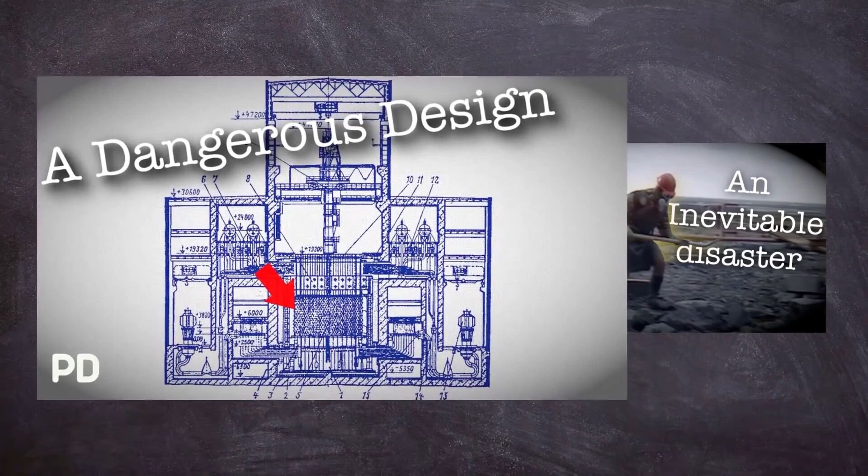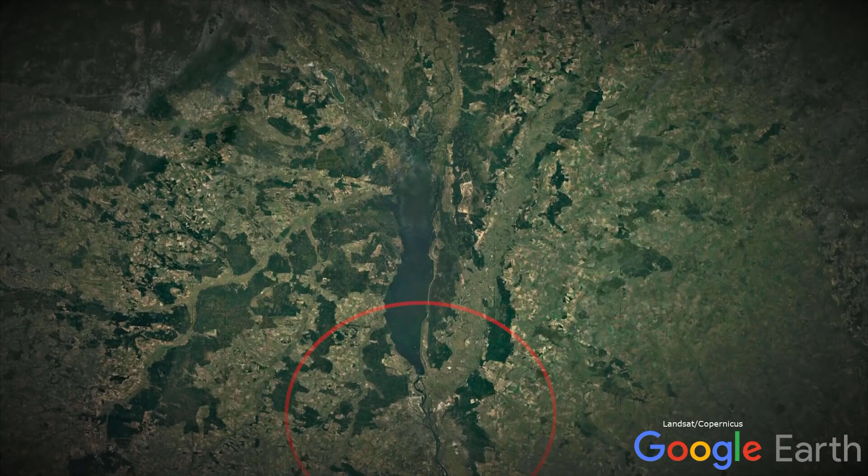Our story starts back in 1970 in Ukraine, about 100 kilometres, 62 miles, from Kiev, when ground was broken for a new city that would become known as Pripyat, an atomgrad that was designed to house the workers for a new nuclear plant. It should be said that the original plans were to build the city and the plant just 25 kilometres or 16 miles from Kiev, but it was thought to be too close to a major city, which turned out to be a good decision.

The concept of an atomgrad is similar to, say, Tomsk, which were closed cities, although Pripyat was open later on in its short lifetime as a city. These municipalities were designed to be self-contained communities that had a sole purpose, and that was keeping the power plant working and, by extension, the workers that were employed there happy. The community at Pripyat was developed to be the perfect home for a young family, with its amusement park and modern, at the time, architecture.

In the same year, the ground where the new plant would exist was prepared for construction. The Chernobyl nuclear power plant began construction proper in 1972 after the central government decided on what type of reactors the site would house. Originally, a pressurised water reactor was thought to suit the new plant, but it was overruled by Anatoly Alexandrov, the chief scientist who was at the time supervisor of the project of RBMK reactor plants. The reactor type was preferred due to the design being cheaper to produce, and as we found out with Leningrad, that cost was a pretty high priority, some might say even over safety.

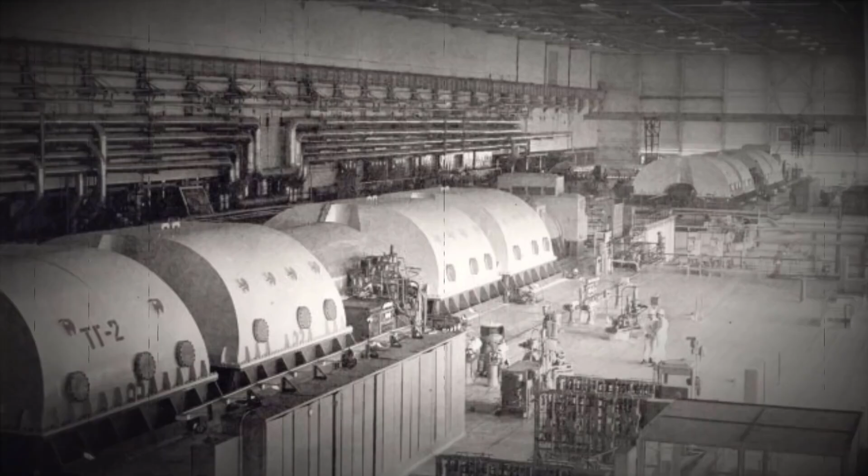The nuclear power plant had the first of its 4 reactors ready to operate in 1977, followed by number 2 in 1978. As a quick side note, Units 1 and 2 were the first generation RBMK 1000 reactors, and because of this they had slightly different core loadings and containment structures. But the remaining 2 reactors at Chernobyl were of a slightly more modern second generation, and they were named Units 3 and 4, which went online in 1981 and 1983 respectively. There were plans for another 2 units, but these were abandoned after 1988 when risks of contamination left the project untenable.

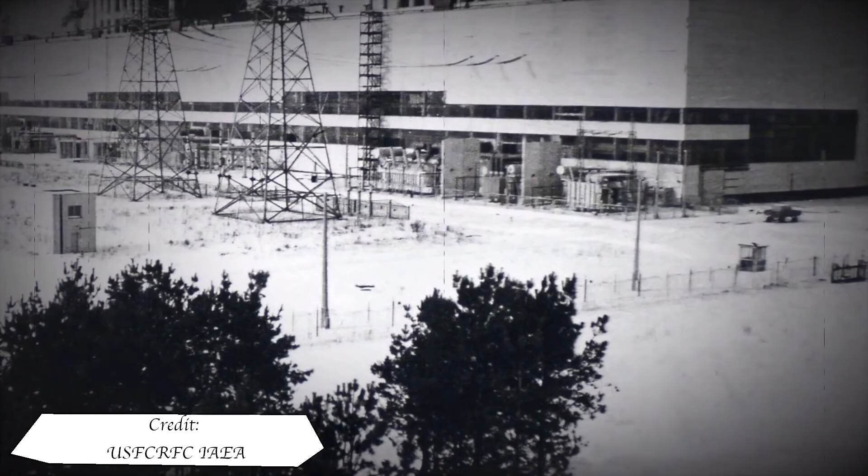The nameplate capacity of Chernobyl nuclear power plant was Unit 1 at 1000 megawatts of electricity, Unit 2 at 1000 megawatts of electricity, Unit 3 also had 1000 megawatts of electricity, and the same with Unit 4. In this video, I'll be focusing on the second generation RBMK, its design, and more specifically Unit 4. But I did look into the first generation in the Leningrad video.

The RBMK was a bit of a unique design in the reactor world, but it was a product of evolution rather than revolution, in that it used graphite to moderate the chain reaction with light water as a coolant. This combination allowed it to use lower enrichment uranium-235 for fuel, which is not surprisingly significantly cheaper than other reactor designs. The RBMK had a very large core region consisting of a height of 7 metres and a diameter of 11.8 metres, which was mounted in a steel cylinder that was placed on top of a biological shield.

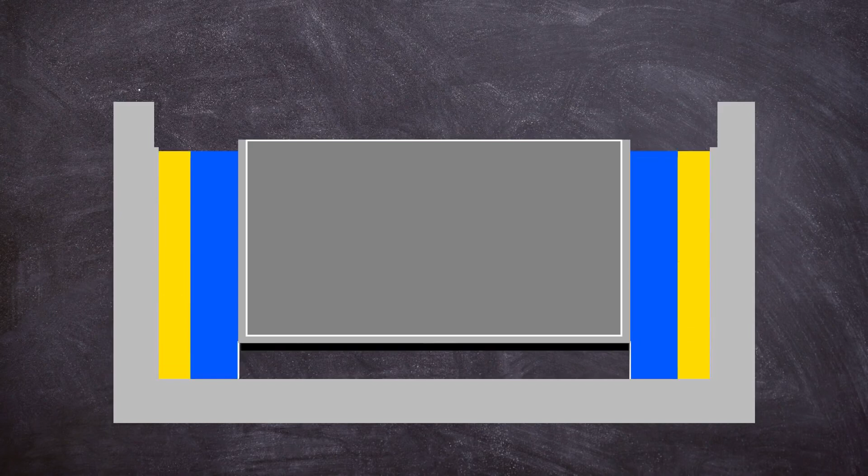The steel cylinder was 16mm thick and had a diameter of 14.52 metres by a height of 9.75 metres, dug into the floor of the reactor building, inside a reinforced concrete lined pit. Between the steel wall and the concrete lining, a water tank was placed, followed by a sand packing. Below the bottom biological shield, there were several basements used for pipework for the reactor core cooling loops. The core consisted of graphite blocks sized 25 by 25 centimeters, stacked up with holes drilled through the center for fuel and control channels.

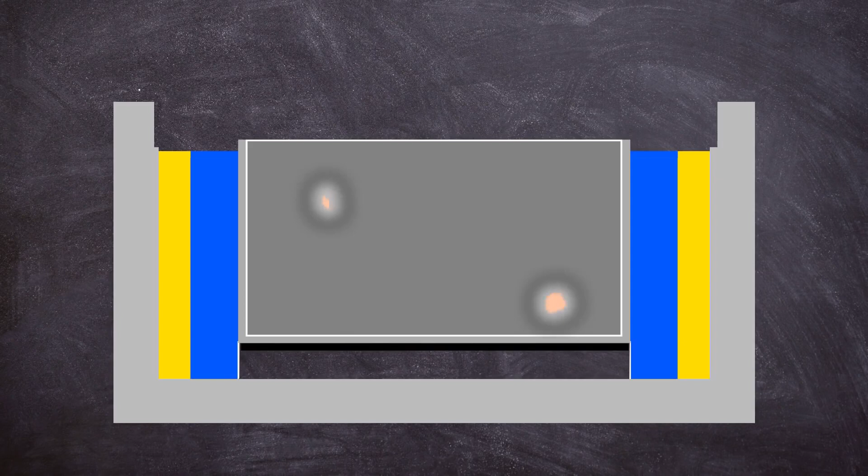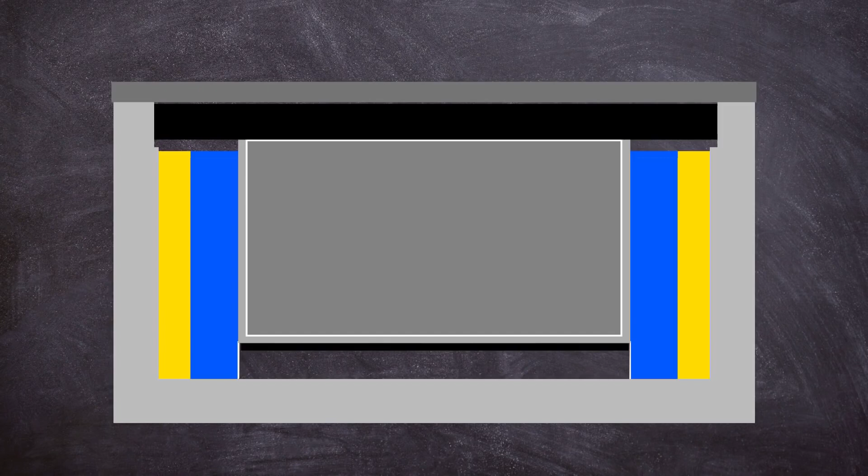The size of the core could cause issues in reactivity control during operation, but we will talk about that a bit later on. On top of the core, another biological shield was placed with a steel cover on top of it, which formed the floor of the reactor hall. The cover plate was capable of withstanding a pressure build-up resulting from steam released by two simultaneous channel ruptures.

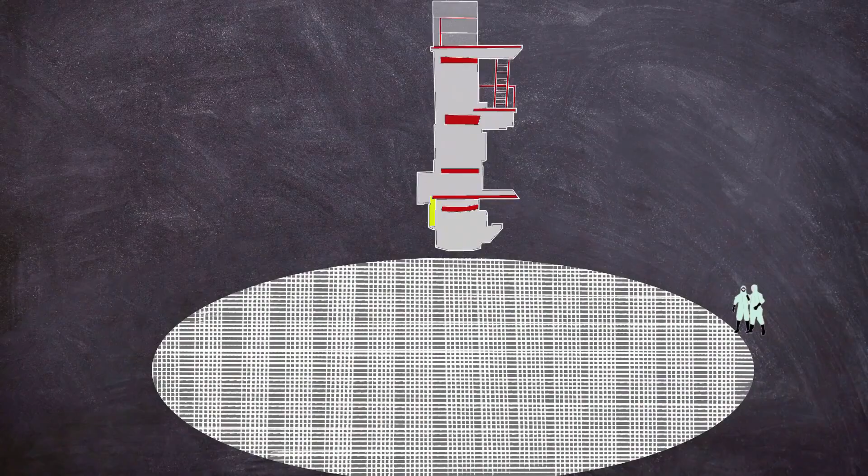All of this allowed the design to be refueled whilst in operation, which again helped with costs by reducing downtime. As a side effect of this, the confinement structure of RBMK reactors is less than ideal, as the tall refueling machine had to be housed inside the reactor hall. Because of the large floor space and subsequent roof requirements, the vast quantities of heavy concrete wouldn't have been architecturally, or more importantly, financially viable.

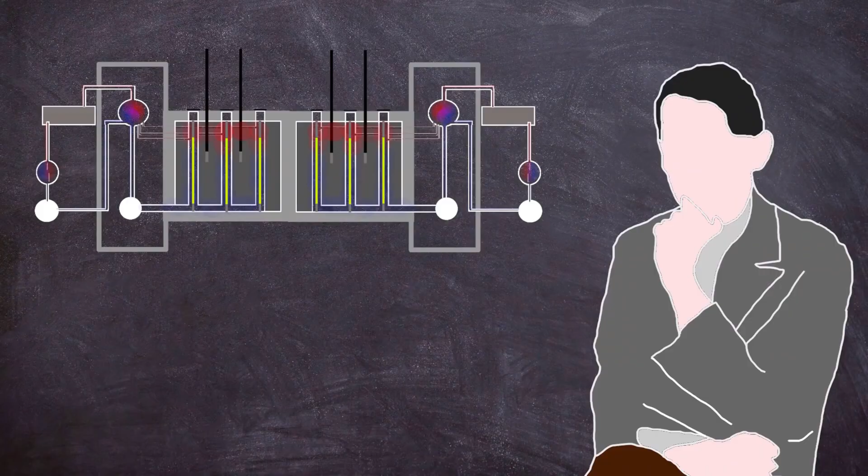The RBMK didn't have a prototype and was instead put straight into production, with the first reactor being installed in Leningrad in 1970. The original designs omitted confinement, instead claiming that the fuel being in its own channel with flowing cooling water was an acceptable alternative. The main takeaway from this is confinement was poor, resulting in disastrous results in the case of fission product release.

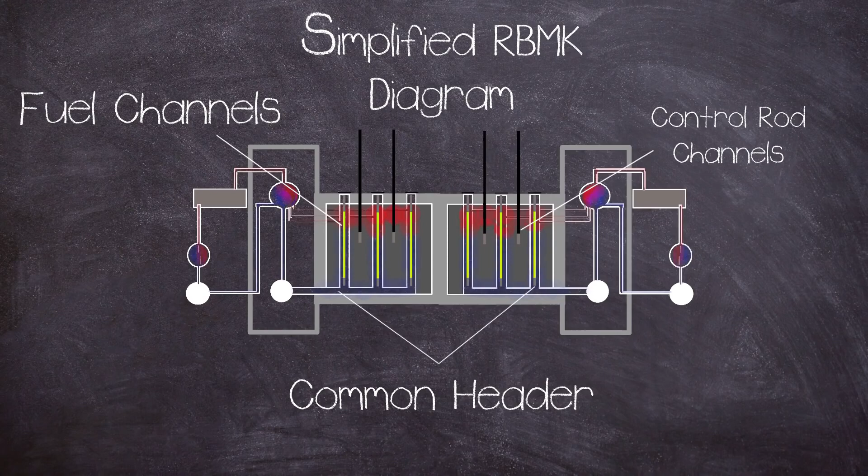The coolant was pumped through the core, from the bottom common header through high pressure tubes that jacketed the fuel elements, where the water would boil. Coolant water also circulated in the control rod channels. The primary cooling of the reactor was via two separate cooling circuits, one for each half of the core, meaning everything was doubled up, leading to eight main circulating pumps, which were three operating and one standby per loop.

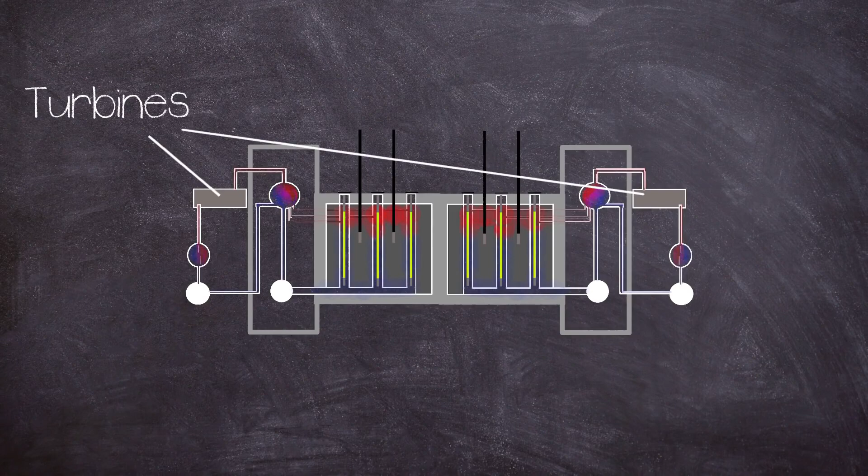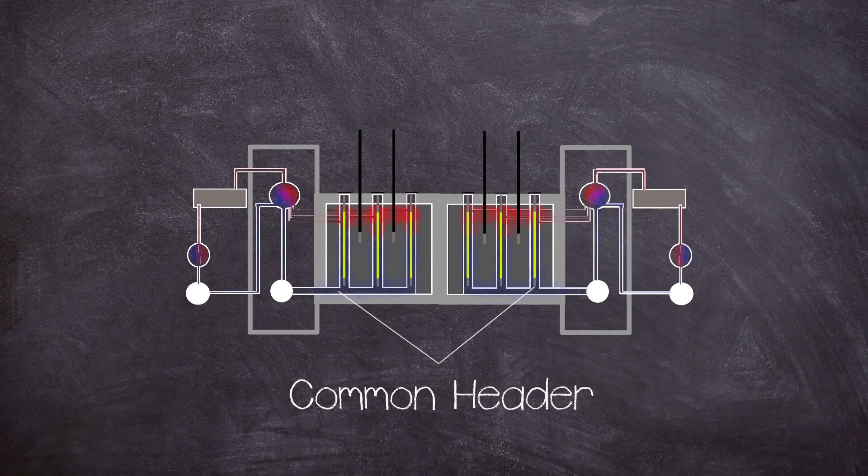As the coolant boils, it exits the top of the core and is passed through a water steam separator, which takes the steam to high then low pressure turbines which generate the electricity. The steam is then passed through a condenser that turns it back into water to be pumped back into the core, completing the primary cooling circuit. The condenser is cooled by using a separate secondary water cooling circuit, meaning the primary cooling circuit is self-contained.

As mentioned before, the reactor employed graphite blocks for its moderator. Now, a moderator is used to reduce the speed of fast neutrons released from fission, so they can better facilitate a chain reaction, getting more use out of the fuel. Ideally, moderators work without capturing any neutrons, leaving them as thermal neutrons. But where the design has its potential flaw is having a separate coolant that can also absorb neutrons, which can make the reactor unstable in certain situations.

This brings up the big elephant in the room, and that is void coefficient. You see, it wasn't just the graphite that had moderation characteristics, but the coolant water as well, because H2O naturally slows down and absorbs neutrons. This brings a problem for the reactor, as with the increase in temperature from fission, the coolant boils off into steam, known as voids, i.e. a bubble that does not absorb neutrons. With the steam not absorbing neutrons, this leads to an increase in the power of the reactor.

The RBMK did not rely solely on its coolant for moderation, because that's what the graphite was for, but the water did absorb neutrons, meaning that as it boiled off, the operators had to compensate for this with the control system. If not properly managed, a runaway can happen as the coolant heats up, increasing reactivity, heating up the coolant more, creating more steam, leading to greater reactivity, and this is called a feedback loop. During this reactor state, more and more neutrons are produced and their density grows exponentially fast, creating a positive void coefficient. The risks of a feedback loop were greater at certain power levels, but this will be covered later on.

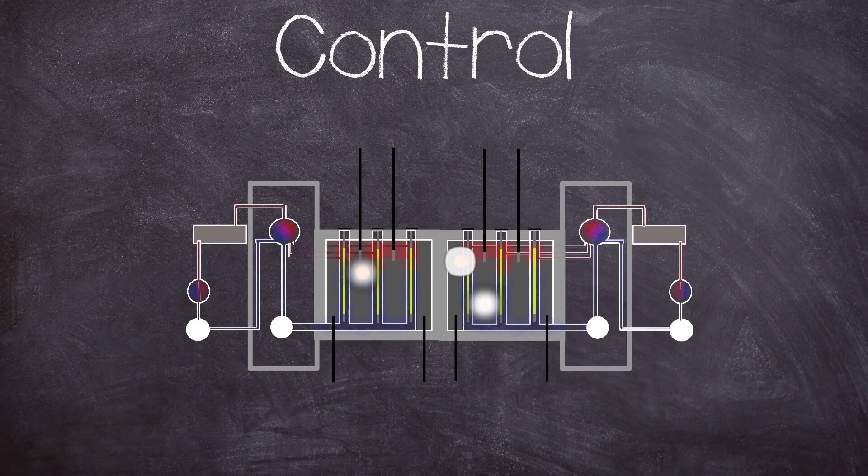Now this leads us quite neatly onto reactor control. As I said before, the core region was rather big, and this meant that the RBMK was kind of like multiple smaller reactors in that hotspots could occur which needed to be individually managed. And this leads on to the strange design choice for both top-loaded and bottom-loaded control rods. There were 167 top-loaded rods and 32 shortened rods loaded via the bottom, and another 12 automatic controls inserted from the top.

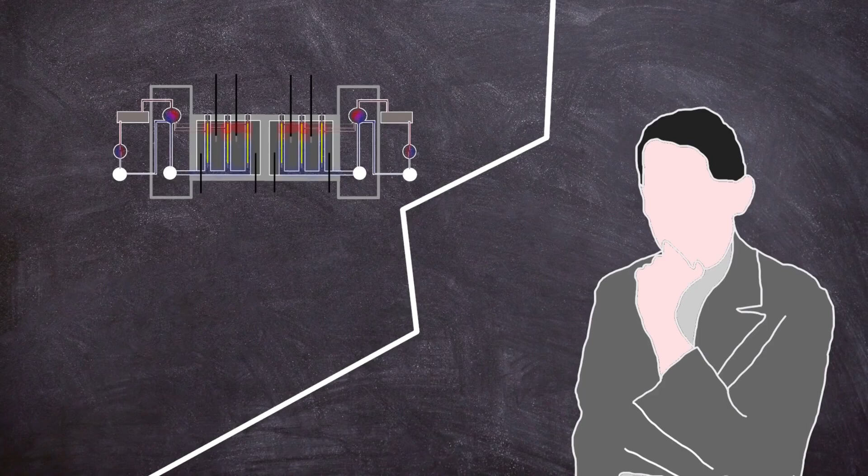The shortened rods were used to manage axial power distribution, which was necessary due to the core size to manage hotspots. The main control rods had a 4.5 metre long graphite rod termed a displacer attached to the end of the length of the control rods, except for the 12 rods that were used in automatic control.

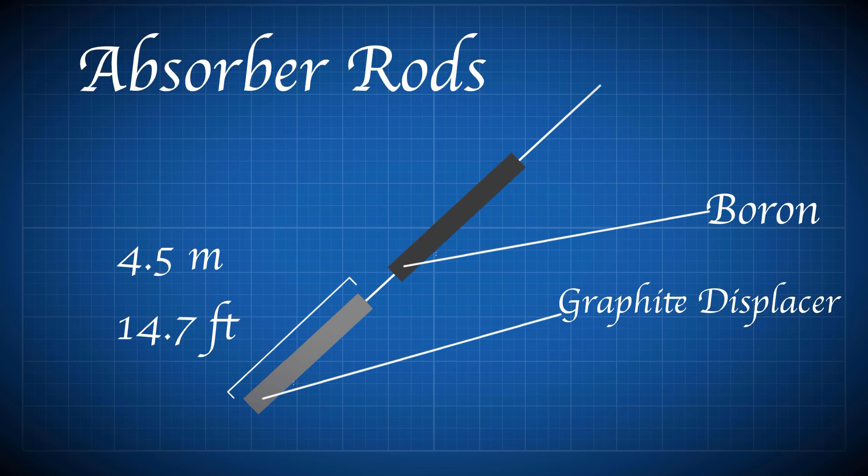The displacer connected to its rod via a telescope, with a water-filled space of 1.25 metres separating the displacer and absorbing rod. This was to stop water filling the space left behind by the control rod after it has left the core region, which would parasitically absorb neutrons.

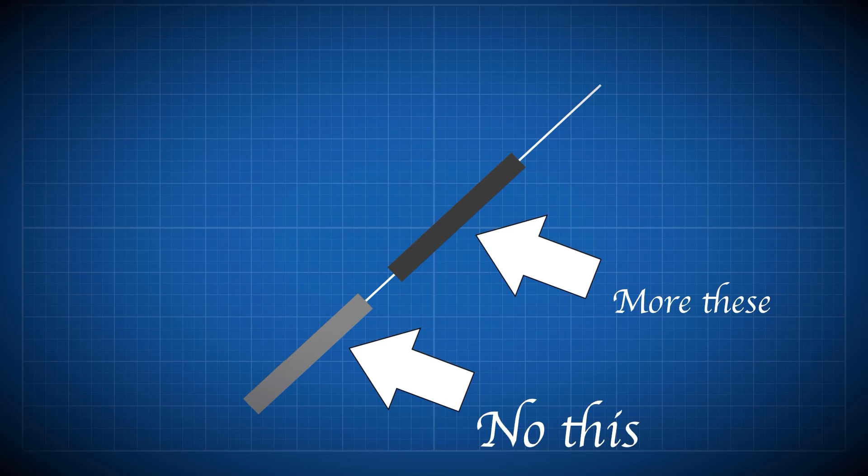Because removing one neutron absorber in the form of a boron control rod to be replaced by another neutron absorber, albeit weaker, in the form of H2O, kind of defeats the point of a control rod. Thus, if there was no displacer, then more control rods would be needed, as each one would have less of an effect on the reactivity of the core.

The dimensions of the rod and displacer were that, when the control rod was fully extracted, the displacer sat centrally within the fueled region of the core, with 1.25 metres of water at either end. But this setup in certain situations could cause a positive scram effect. On receipt of a scram signal causing a fully withdrawn rod to fall, water was displaced from the lower part of the channel as the rod moved downwards.

This caused a localised insertion of positive reactivity in the lower part of the core. This was because the RBMK had a high moderator to fuel ratio, meaning the lower part of the core would experience a spike in reactivity as the graphite displacer entered it, as it replaced the neutron absorbing water with a neutron moderating graphite.

But this situation was only dangerous at certain power levels of the reactor, which was meant to be mitigated by the knowledge and training of the operators, and also importantly by their management. Part of this mitigation was by having an operating reactivity margin. The ORM is the number of equivalent control rods of nominal worth remaining in the core.

The total time required for a scram or insertion of the emergency control rods into the core when starting from the upper limit stop switches was around 18 seconds, which was relatively slow, but this was due to the size of the control rod channels and the fact that the coolant had to be pushed out of the way. The scram could be initiated by the control system or manually via the AZ5 button.

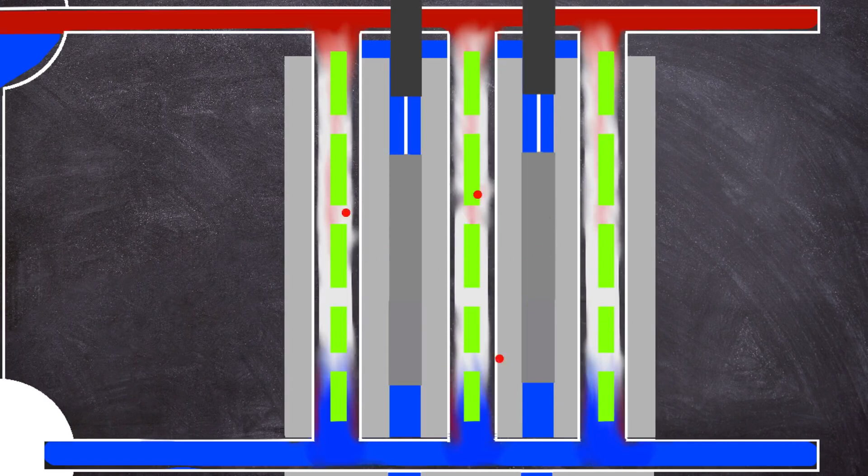Right, I need to mention neutron poison, as it will play a vital part later on, and was also a contributory factor in another RBMK incident, the meltdown in Leningrad in 1975. During fission, some products are given off, one of which is xenon-135, which has a high neutron absorption rate, which is okay when the reactor is in a steady state, as it burns off this undesired byproduct, as poison burning is proportional to reactor power.

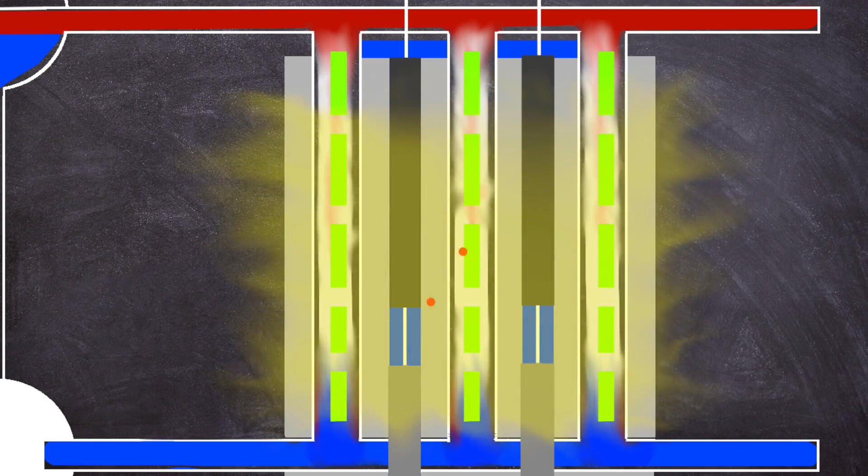But when the power of the reactor is decreased, the xenon-135 is not burned off, and can shut down the chain reaction by absorbing too many neutrons. This is known as an iodine pit. All is not lost, as xenon-135 has a relatively short half-life of around 9.2 hours, so a reactor core is considered poison-free after several half-lives have passed.

But this is not good from an economic standpoint, as the unit would be shut down for a few days, which is where good management is meant to come into effect, where safety is prioritised over money, but in the former USSR, taking a reactor out of action for a few days could have a detrimental effect on one's career longevity. Our story starts with an issue inherent to all reactors of any type, a thing called decay heat.

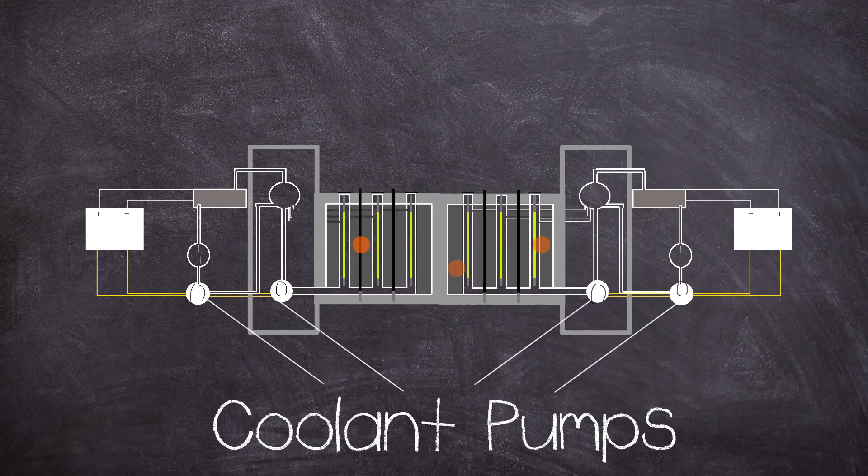And when the reaction stops, this continues, at least for a while after shutdown. During power operation, this is fine as electricity is being produced, but after shutdown, the pumps need to keep circulating to remove the decay heat. Usually the electricity needed for the pumps can be drawn from the national grid. But what about if there is a full power outage? Then backup is needed. This presents a problem.

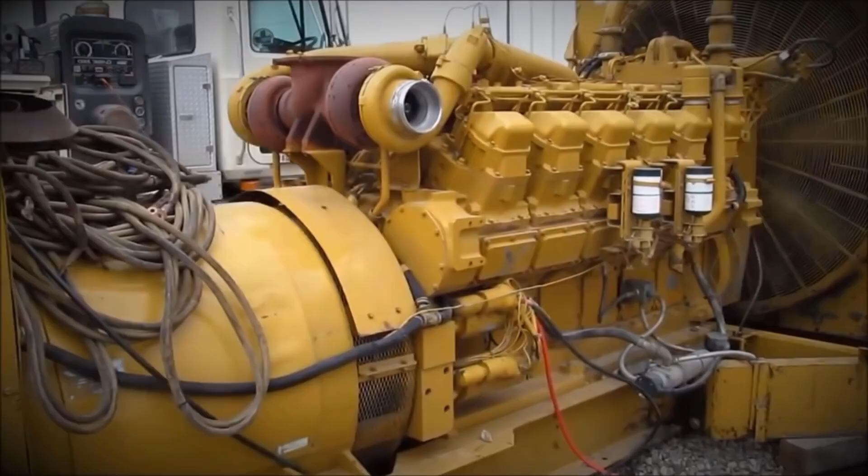If for any reason, being scheduled or not, a reactor is shut down and there is a power cut, how will the pumps keep working? Well, the solution is pretty simple, and that is a diesel backup generator. Each of Chernobyl's reactors had 3 backup diesel generators, which took in excess of 70 seconds to reach full power. Too much time in the event of a full power cut.

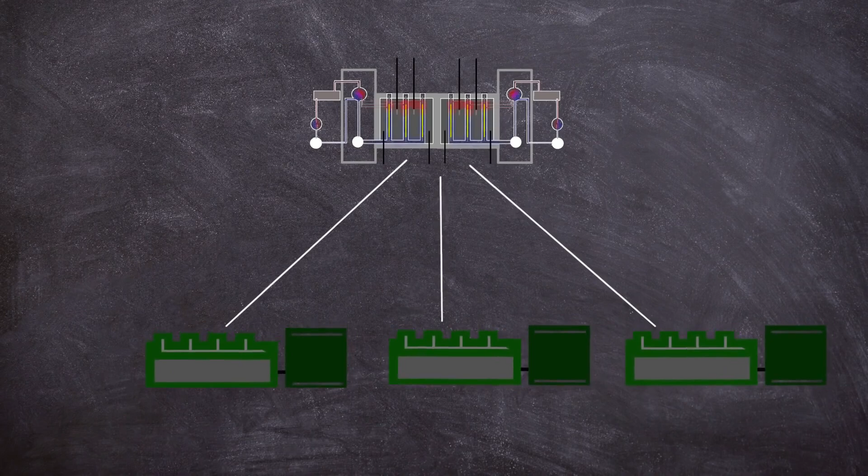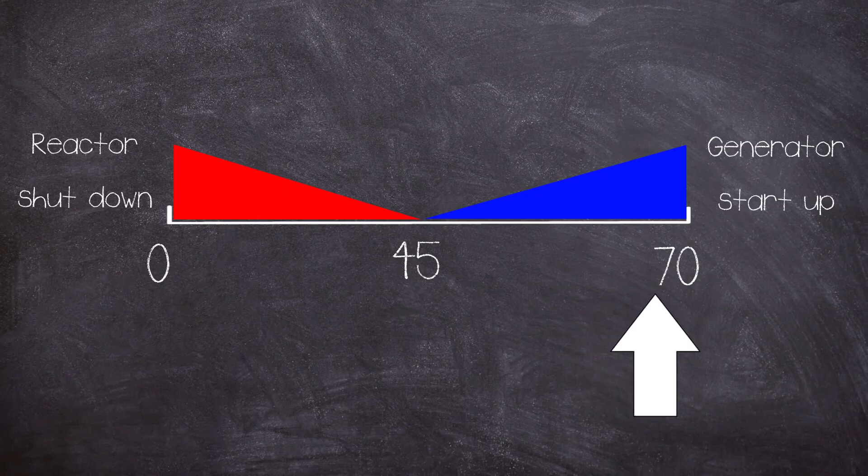In theory, some of this time could be covered by the spool down of the turbo generators, which was theorised to cover around 45 seconds. Not the full time needed, but possibly enough to prevent fuel melting. To prove that this could work, it had to be tested out, and in 1982, 1984 and 1985 this was attempted, but all tests failed to produce the electricity needed to run the pumps. The test was to be conducted again in April 1986.

Strangely, the test procedure that was written hadn't taken into account the eccentricities of the RBMK reactor, especially at low power outputs. The test was to be conducted during a routine shutdown. For the test to go ahead, some vital systems had to be switched off, most notably the active-passive emergency cooling system used in a loss of cooling accident. This required the chief engineer to sign it off.

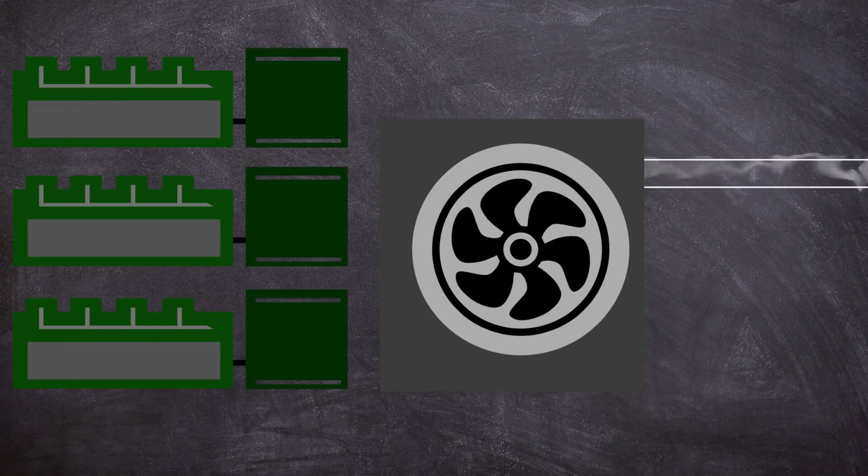In preparation for the test, the following had to be set up. The reactor power was to be reduced to between 700 and 1000 megawatts of thermal energy, and the steam turbine generator was to be at normal operating speed. After all this was sorted, the preparations for the electrical test could go ahead. The steam supply to the turbine generator would be closed off. The turbine generator performance would then be monitored to see if it could bridge the power for coolant pumps until the emergency diesel generators took over.

When the emergency generators supply electrical power, the turbine generator will be allowed to continue freewheeling down. The normal planned shutdown procedure of the reactor was then to be completed. The date of the test was to be the 25th of April 1986, 15 minutes past 2 p.m., completed by the day shift. As such, the operators were briefed on the procedure and a team of electrical engineers was present.

At around 1 a.m. on the 25th of April, the reactor was gradually powered down to around 50% in time for the day shift. At 1:05 p.m., the turbo generator TG7 was switched off. The 4 main circulating pumps, 2 electrical feed water pumps and other electrical equipment that was connected with this turbo generator were switched over to bus bars for the turbo generator TG8.

The ECCS was disabled with the correct authorization from the chief engineer, but just after 2 p.m., the Kiev electrical controller asked for the test to be postponed to cover the evening electrical peak demand. The request was due to another power station in the region unexpectedly going offline. Chernobyl's director agreed and the test was pushed back, but the ECCS was not reinstated. The status of the ECCS showed the lack of safety culture at the plant. Although the system wouldn't really be a factor in a disaster, it highlights the management culture at the time.

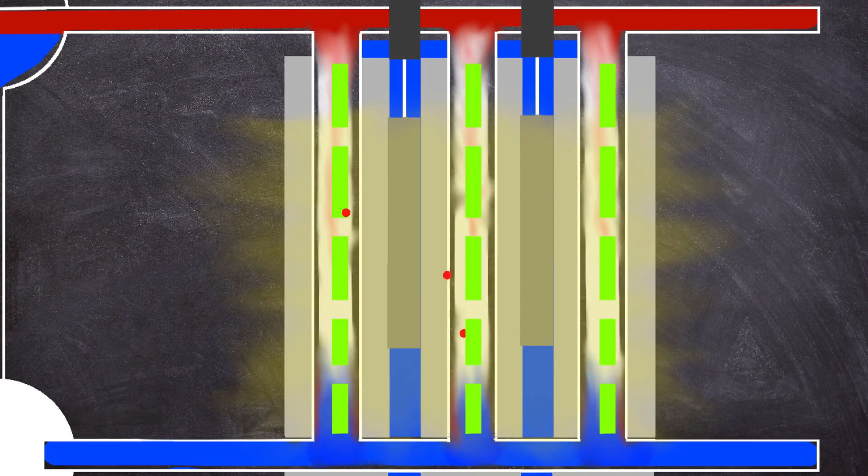This reduced the power of the reactor without any operator intervention to 500 megawatts of thermal energy, at which point manual intervention was started in order to maintain the level. At 28 minutes past 12 on the 26th of April, the reactor power had dropped to just 30 megawatts of thermal energy, with a near shutdown-like state. It is not 100% known why, but both equipment failure and operator error have been attributed to the reactor state.

As set out in the operating instructions, the reactor should have been powered down to wait for the xenon-135 to decay, but shutting down the reactor without doing the test wouldn't have made many friends in management. To increase the power, the control rods began to be removed to try and overcome the poisoning of the core, reduced coolant void and graphite cooldown.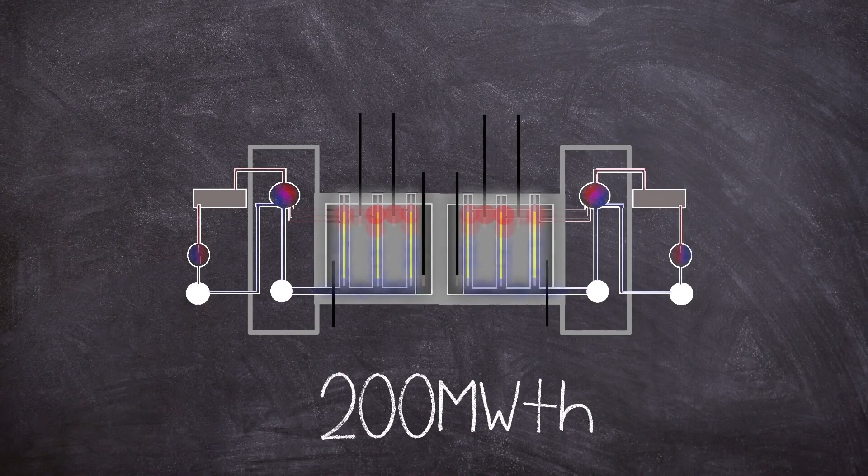In the attempts to raise the power, the operational reactivity margin was violated by removing more of the absorbing control rods, and by 1 AM around 200 megawatts of thermal energy was reached. The reactor was now in a dangerous state. Not wanting to leave empty-handed, Dyatlov insisted that the test be conducted at the current power level.

In reality, the core was heavily poisoned and was in a dangerous state with very few absorbing rods for emergency control. During the preparations of the test, the operators powered up the 2 backup coolant pumps, leading to all 8 working. The increase in water flow reduced the voids within the core, which would have set off an automatic scram, but this was bypassed by the operators.

As the coolant absorbed the neutrons in the core, only 8 control rods were left as a safety margin. The minimum that the ORM stipulated was that around 28 rods should have been in the core. The reactor started to experience a feedback loop. With not many rods in the core to manage the power, the water in the reactor found itself being the main neutron absorber, and disaster was just waiting to happen.

At 1:23 in the morning, the actual test had now begun. The command was given, the stop valves for turbine number 8 closed and the rundown operation started. As the turbine spooled down, the power to the feed water pump slowed, increasing the temperature of the coolant, creating more voids. With less water absorbing neutrons, the power of the reactor began to rise. A feedback loop was beginning to start in the lower part of the reactor core.

The operators pressed the AZ-5 button in response to the worrying increase in power, and the control rods started their travel into the reactor core. As the control rod attached graphite displacers moved down to the lower part of the core in their control channels, the neutron absorbing water was pushed out of the way, creating a momentary spike in power, replacing it with neutron moderating graphite.

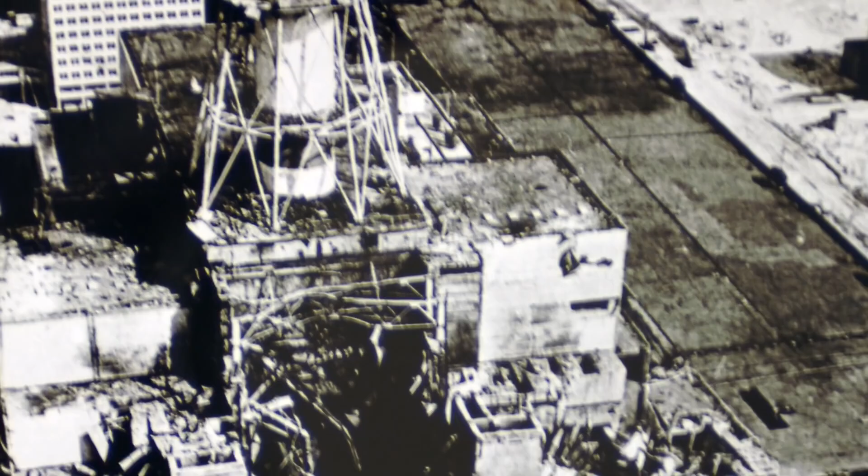Some of the debris that was ejected started a fire on the roof of Reactor 3's building, but insanely the unit wasn't shut down straight away. Instead, the operators were told to take iodine tablets and don respirators. At 1:45 in the morning, the first responders from the Chernobyl fire team arrived under the command of Lieutenant Vladimir Pravik and began trying to extinguish the flames on Unit 3's roof. All around them lay pieces of Unit 4's graphite core.

The firefighters were only aware of the fire, and because of this they didn't have any radiological protective clothing on. As they worked, they breathed in some of the fission material in the form of dust and were exposed to the deadly radiation.

Many would come down with acute radiation sickness shortly after. Some of the first responders felt a metallic taste in their mouths, similar to what others had reported post-exposure, for example from the victim of the Wood River Junction criticality.

The fires on the roofs of Units 3 and 4 were under control between 2:10 and 2:20 in the morning, and the fire was fully put out at 5 o'clock in the morning. However, the graphite fire in what was once Unit 4 continued to burn, expelling its radioactive plume of dust, steam and smoke into the atmosphere. The operators started to pump water into the core, but this did little to bring the situation under control.

The estimated dose of 5 to 6 Röntgens per second was experienced around some parts of the reactor building, which is equivalent to more than 20,000 Röntgens per hour, which is enough to give you a lethal dose in minutes. The effective dosimeter monitoring of the operators was unavailable when the two 1000 Röntgen per second capable meters were inoperable. The only remaining meters maxed out at 0.001 Röntgens per second, which immediately read off the scale when used, meaning that no one in the control room actually knew what they had received.

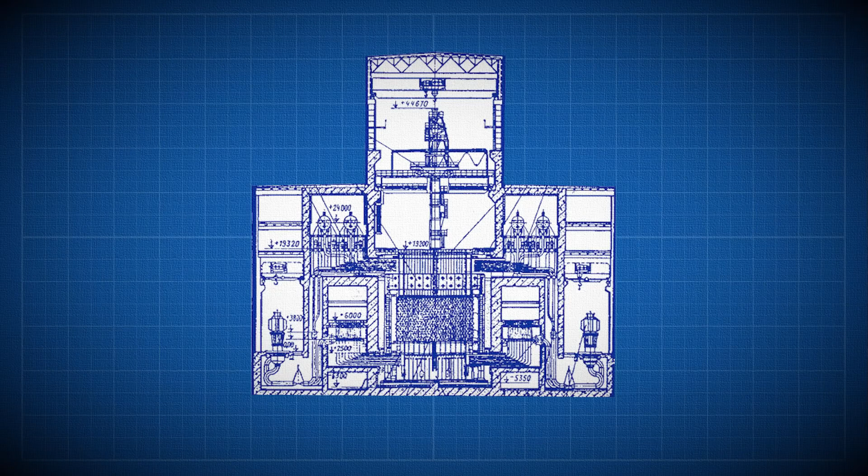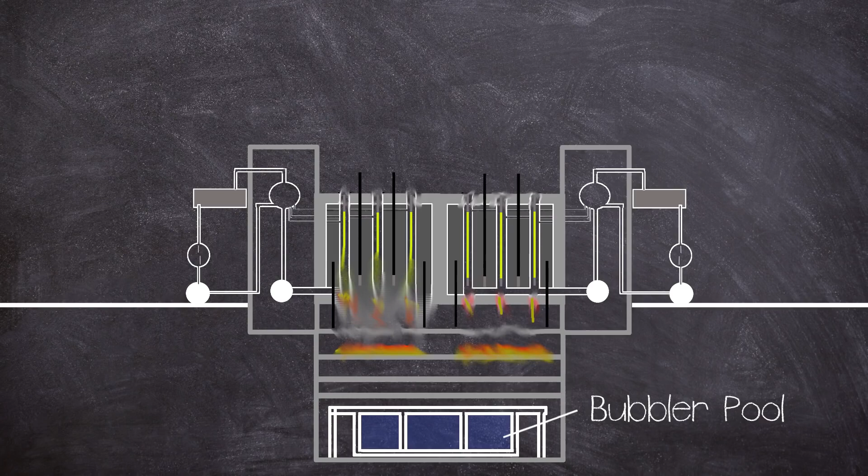Engineers Alexei Ananenko and Valery Bezpalov and supervisor Boris Baranov volunteered to empty the bubbler pools. This was done by valves controlling sluice gates, which were housed in a room that had now become flooded. All three men donned protective suits and breathing equipment and made their way down the corridor. The men were successful and the bubbler pools began to empty. Surprisingly, all three survived not only the day but continued to live long after the disaster, averting the immediate steam explosion. But that wasn't the end to the worry of a deadly explosion.

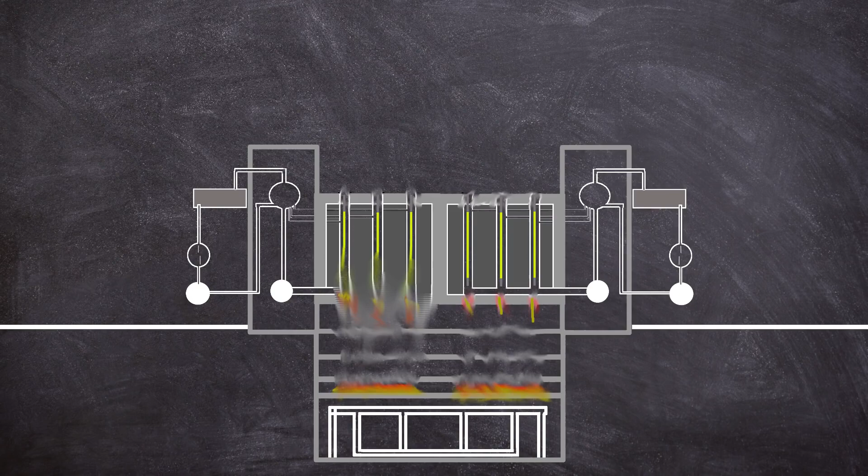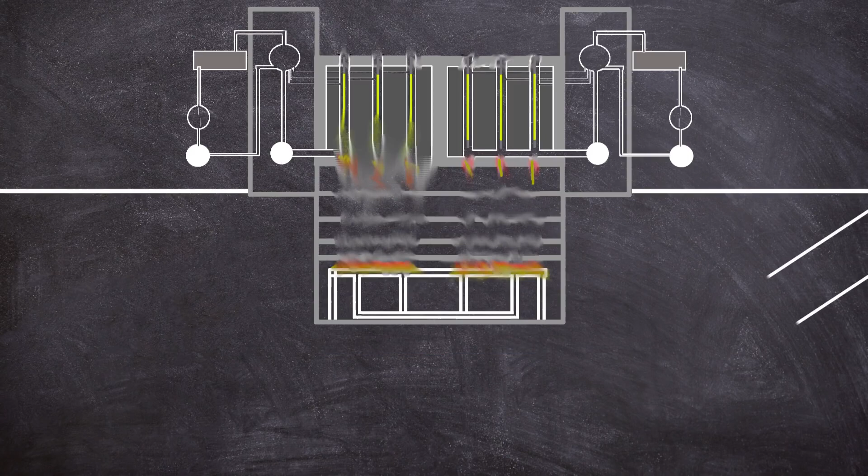As described in the film China Syndrome, the core could continue to melt through the floor of the containment and into the earth, eventually hitting the water table, meaning another steam explosion. The next focus of the accident management team was stopping the molten core from escaping the bottom of the reactor basement. A design that was thought up by physicist Leonid Bolshov involved digging out a cavity below the reactor building basement. The concept used coiled formation of pipes cooled with water and covered on top with a thermally conductive graphite layer. The graphite cooling plate was to be encapsulated between two sacrificial concrete layers, each one a metre thick. In theory, as the molten uranium oxide hit the graphite, it was to rapidly cool down, catching the core meltdown.

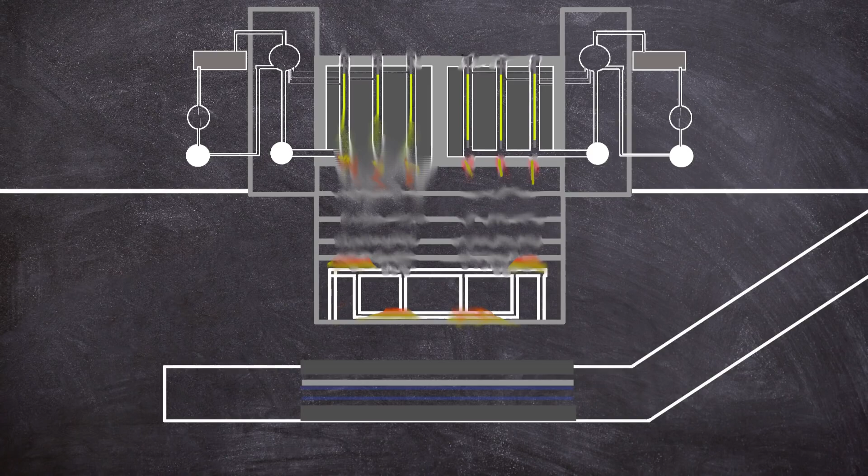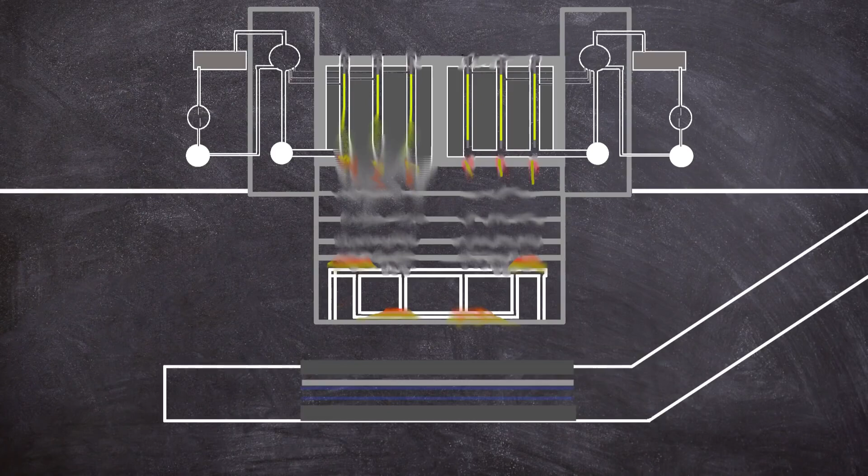Thankfully, the theory didn't have to be put into practice, as the core had finally come to rest in one of the lower basements of the reactor building, part of which formed the famous Elephant's Foot, which was discovered in December 1986, which had a radioactivity of 8,000 Röntgens, or 80 grays per hour. For reference, a whole body dose of around 5 grays can be lethal. The molten material is known as corium and is a mixture of the material found inside the core, and is mainly made up of silicon dioxide with traces of uranium, graphite, zirconium and titanium. The excavated cavity and cooling system, now unneeded, was filled with concrete to help the structural integrity of the heavily damaged reactor building.

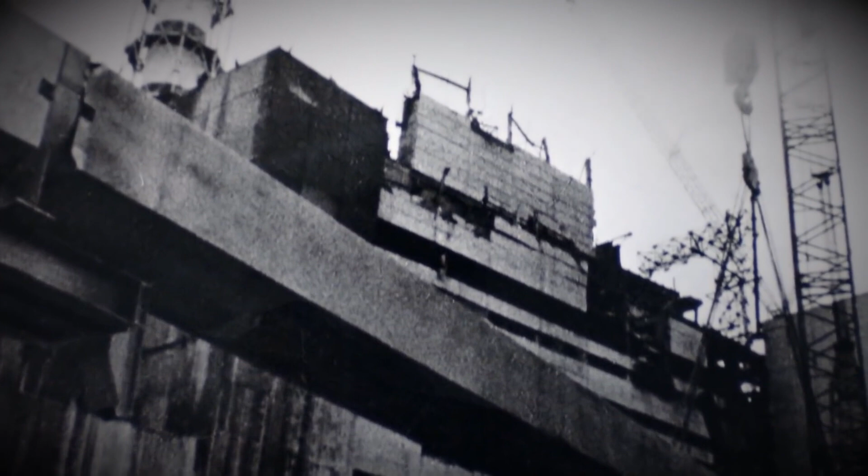A plan was conceived to contain the contamination release of Unit 4 in the form of a concrete lid, which would come to be known as the sarcophagus. Construction began in May 1986, 24 days after the disaster, to encapsulate some 200 tonnes of radioactive corium, 30 tonnes of highly contaminated dust, and 16 tonnes of uranium and plutonium. The construction would last for 206 days, between June to late November of the same year.

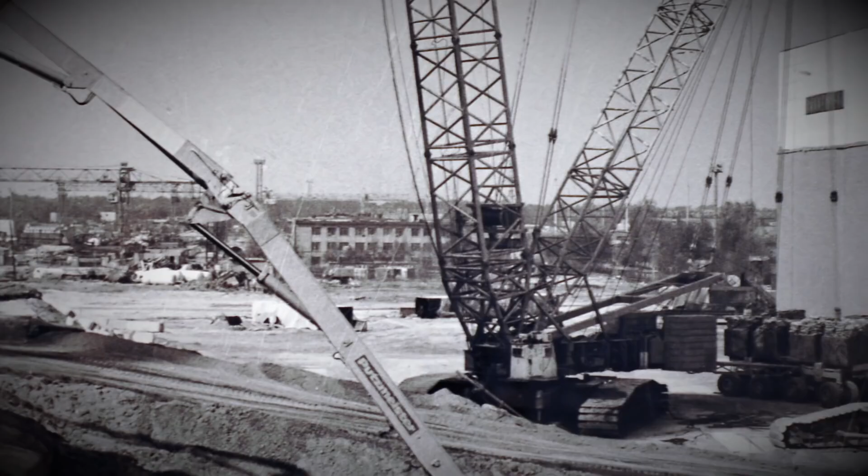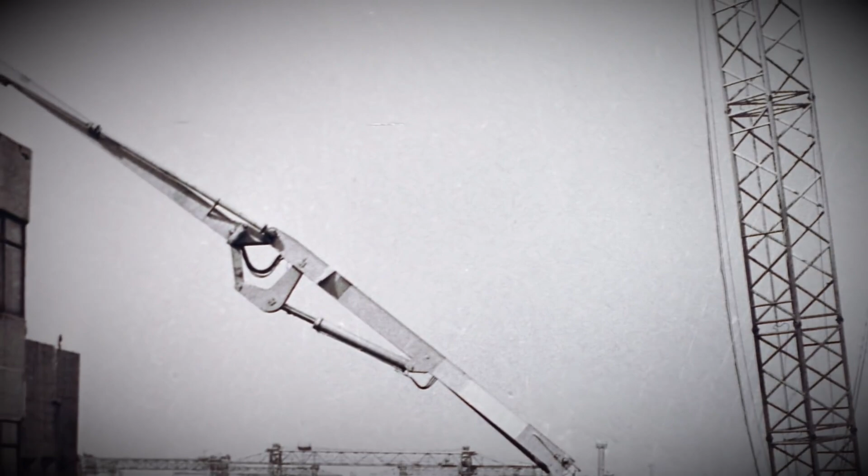But before the core could be enclosed under the sarcophagus, the next phase of remediation was to remove all the core material that scattered the area, and one of the most dangerous places was the roofs of the buildings surrounding Unit 4. Initially, robots were thought to be able to undertake the clearing works, but due to radiation interference, only around 10% of the debris could be recovered. This necessitated the use of good old-fashioned people. The most basic of equipment was needed for the task, which included protective clothing and a shovel.

A total of 5,000 people, known as liquidators, were called upon to undertake the cleanup on the roof, each only being allowed between 45 to 90 seconds of total working time to reduce the risk of exposure. The calculated risk was 25 rem, or 250 millisieverts, of radiation per person. There were many more liquidators also used for other clearing up works in the wider area. And finally, after this, the sarcophagus could be closed over the turbine hall and reactor building.

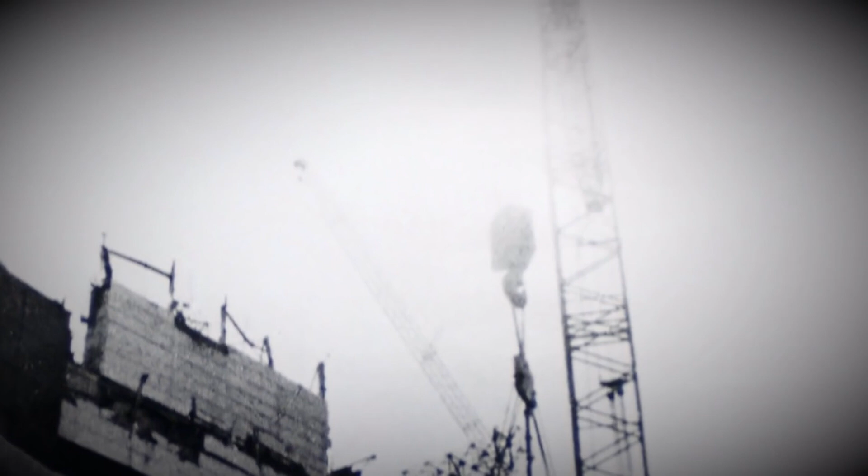The construction was undertaken over 8 stages, all whilst Unit 4 released contamination, and next to Unit 3, which still needed to be operable. Concrete containment walls were built around Unit 4 and a dividing wall was erected between it and Unit 3. The sarcophagus was placed on top of the concrete containment walls. More than 400,000 cubic metres of concrete and 7,300 tonnes of metal were used during the construction of the sarcophagus. The building encapsulated an estimated 740,000 cubic metres of heavily contaminated debris together with contaminated soil.

Holes were installed in the structure to allow pressure release, albeit through a filtration system. The shelf life of the structure was only thought to be around 20 to 30 years, necessitating a new containment structure, but this will probably be covered in the next video in this series. So, with an official death toll of 31, a nuclear power plant essentially unusable, and many decades ahead of remediation works, how was Unit 4 allowed to be operated in such a dangerous state? Unsurprisingly, it comes down to management.

The warning signs of the potential for fuel damage in an RBMK 1000 reactor reared their heads several times for the reactor type's history. A partial fuel melting in Leningrad over 10 years before, in 1975, had been covered up, and information was not passed on to other RBMK operational staff at different power plants. Again, the fuel melting incident that happened in 1982 at Chernobyl Unit 1, no less, was also covered up, this time by Viktor Brukhanov, meaning lessons again were not passed on.

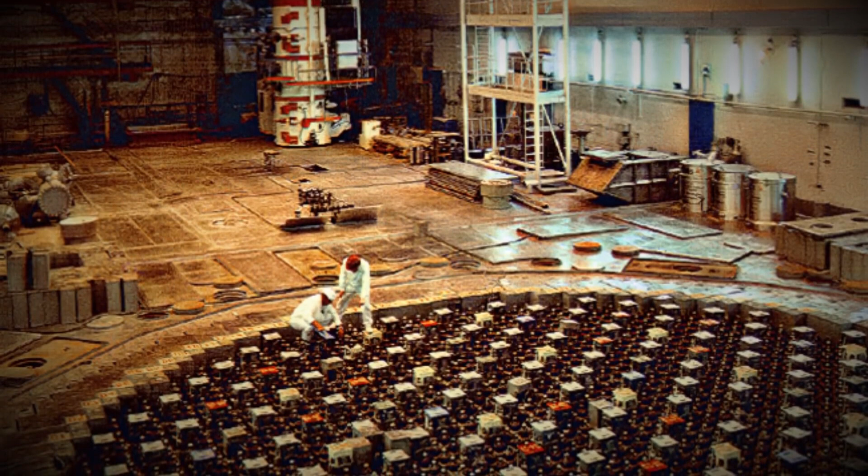The risks of a positive effect of scram causing a power spike were known in December 1983 at Ignalina Unit 1. Unlike other incidents involving RBMKs, the information from the event was passed on to other plants, but was thought to have not been important enough to act on, as the control rods didn't get stuck and did continue to stop the reaction. The IAEA was involved in the investigation into the disaster using the International Nuclear Safety Advisory Group, which had been created by the IAEA in 1985.

All of the reports have never been able to categorically say for 100% what the cause of the core uncovering was, and there is much speculation as to whether the power excursion happened pre or post scram. But operating the reactor in the state it was in meant that something was going to fail. Regardless of the inherent flawed designs of the RBMK, it was operated way out of the agreed parameters even set by the lax Soviet nuclear industry. It can be attributed to the culture of working where failure was not accepted and vital operating incidents were not learned from. As well as this, the design flaws were outright covered up and held back from the operators.

In 1987, a criminal trial was brought against 5 plant employees between the 7th and 30th of July in a temporary courtroom set up in the House of Culture in the city of Chernobyl, Ukraine. They were Deputy Chief Engineer Anatoly Dyatlov, Chernobyl Plant Director Viktor Brukhanov, the former Chief Engineer Nikolai M. Fomin, the Shift Director of Reactor 4 Boris Rogozhkin, and Chief of Reactor 4 Alexander Kovalenko. 3 other men, Alexander Akimov, Leonid Toptunov and Valery Perevozchenko, would have been tried as well, but the cases were dropped after their deaths due to radiation exposure.

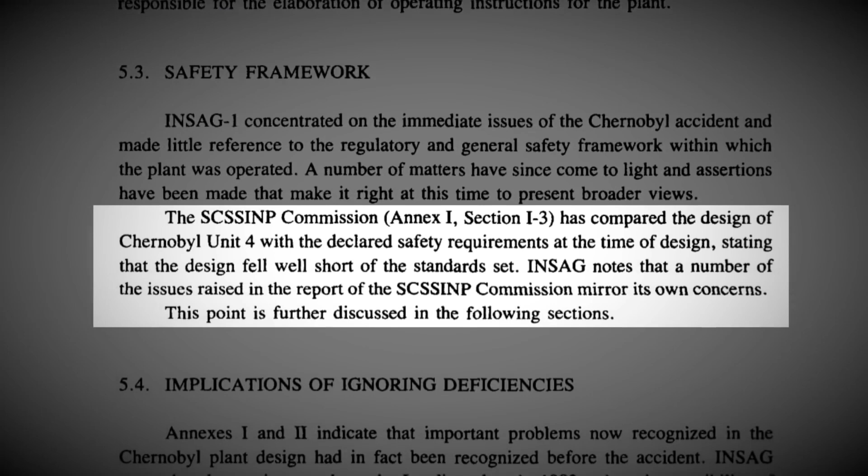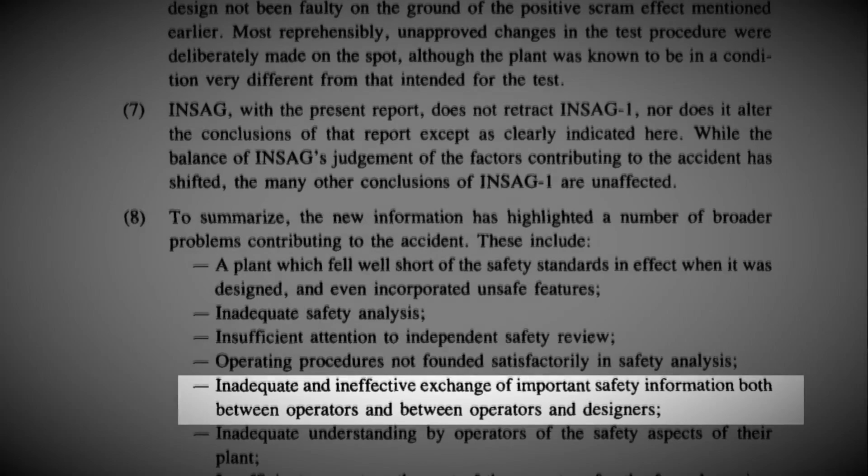This was all highlighted in the 1992 INSAG-7 report, which also said in its summary, the plant fell well short of the safety standards in effect when it was designed, and even incorporated unsafe features, compounded by inadequate and ineffective exchange of information between both operators and between operators and designers. There was an inadequate understanding by operators of the safety aspects of their plant, also affected by insufficient respect on the part of the operators for the formal requirements of operational and test procedures. The industry in the USSR had an insufficiently effective regulatory regime in place to counter pressures for production.

The pressures from central government and lack of awareness of the design risks of the reactor meant that management acted dangerously in the false pretense that the RBMK was indestructible. Pretty much the entire management structure was throwing around a grenade that they didn't know had the pin pulled out of, meaning disaster was only a matter of time.

Now I'll be following up this video with another video at some point, about the wider impact of the disaster on local and wider population, as well as digging deeper into the liquidators and their heroic work. Thanks for watching, I hope you enjoyed the video.